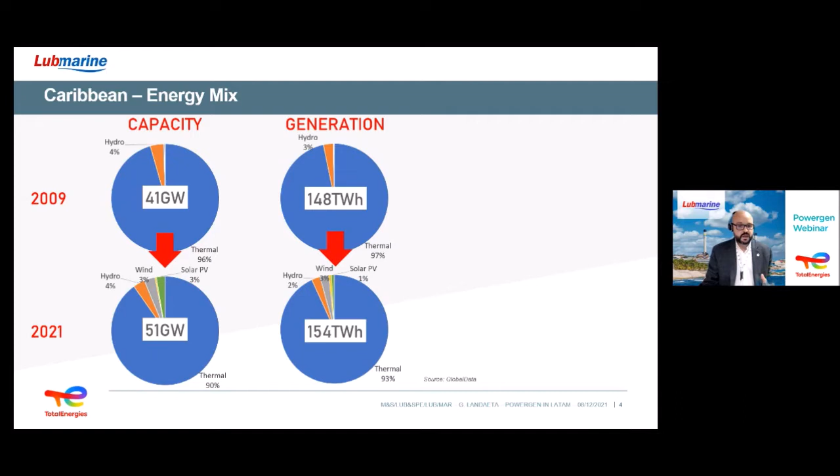But in terms of real generation, we see the zone increasing from 148 terawatt-hours to 154 terawatt-hours, and the mix shows these new technologies being used at a different rate than what capacity shows. We passed from 3% generation on hydro to 2%, a small decrease, or let's say stable in terms of net terawatt-hours. We see wind and solar increasing, but not enough to disturb what the thermal generation may have — still a decrease, or we may say a stable number of terawatt-hours.

So indeed, what we are seeing is the region quickly turning to gas and renewables. This thermal capacity — we'll check afterward how the mix inside it is changing. We can say the region invested heavily in new capacity, probably forecasting a big increase in demand, but it didn't follow the same trend: capacity increased 24%, while demand only grew 4%.

This thermal capacity increased 17%, and as I mentioned, the real generation remained the same. So again, expecting a higher demand than actually came. Yes, may be the case. But the growth came basically from LNG.

54% of new power plants came from pure gas engines. We can see the coal plants sitting in some countries in the region almost double. So we doubled the capacity in coal, but there was no actual growth in generation. And HFO or diesel or oil products increased 5%, but generation dropped 16%. So this is a big decrease in generation. We can see oil products leaving the place for new technologies. We're basically talking about engines, and we are replacing oil for LNG in most cases in general.

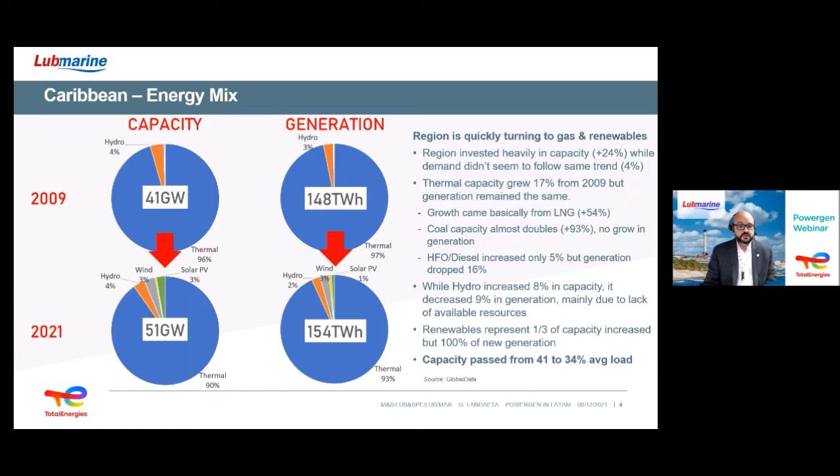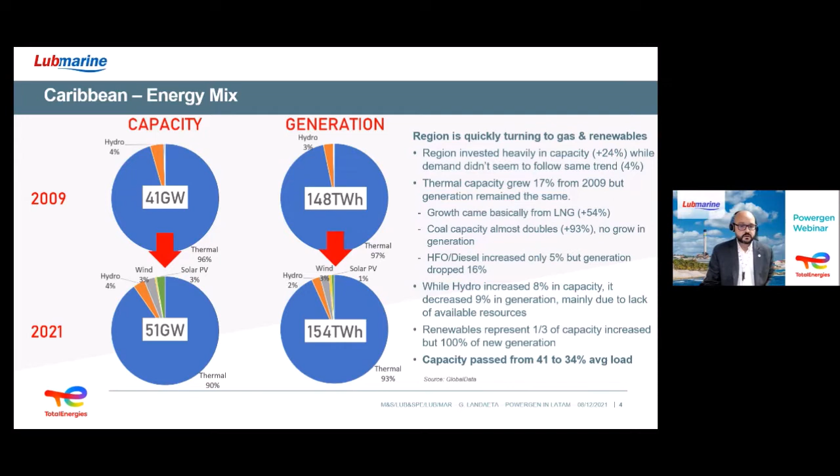And while renewables represent 1/3 of the increased capacity, they represent 100% of the new generation. So these 6 TWh are mostly coming from renewables. This is a big change in the mix for the region. So most of all, if you take these figures into consideration, the capacity passed from 41 to 34% average load. So we are loading the system less. Of course, we have higher capacity with lesser generation in the zone.

Now let's look at Central America. So again, 2 graphics for each year, 2009 and 2021. What we see is a fast pace of growth in capacity, so a big increase in capacity. The capacity almost grew 50%, but demand only grew 32%. So 568 TWh to 753.

The thermal capacity increased 28%, but the generation only followed by 20%. Again, coal and LNG grew in capacity. No new capacity for HFO and diesel, so no investment there. And generation only increased for LNG, while coal and oil products lost 40% of the generation they had in 2009.

Hydro capacity had a steady growth at 23%, let's say half of the growth of the region. Renewables represent half of the increase in capacity, but only 40% of new generation. So we can see a lot of installations, a lot of new plants, probably not turning at the same pace they were intended to. This is, of course, something typical with renewables. We don't know where the sun is shining, we don't know where the wind is blowing, or we cannot predict as accurately as we would want.

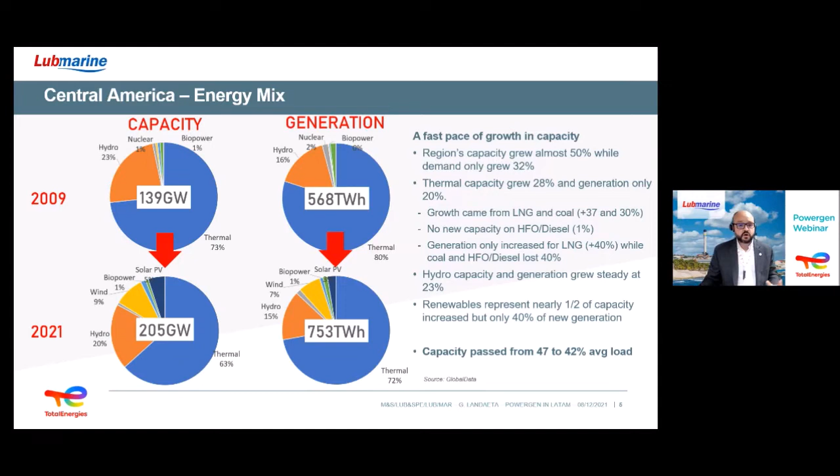And we can see the load of the system passed from 47 to 42. So we can say there was a massive investment in capacity, but demand didn't follow. We wanted to not overload and have spare capacity for the region to allow growth.

Now, if we go to South America, 2 graphics again. This is a region where we have several big power plants based on hydro, so you can see how the colors change. We see a lot of orange, which represents hydro in the graphics, and we can see the mix, which is very interesting to analyze. Of course, we have big countries here: Brazil, Chile, Argentina, Colombia, asking for very big demands.

So a huge appetite for energy and for growth. Again, a big increase in capacity, and demand didn't follow the same trend, only 4%. Sorry, but I think the figures are wrong. I'm going to explain with several graphics. I think this is the wrong version for my presentation.

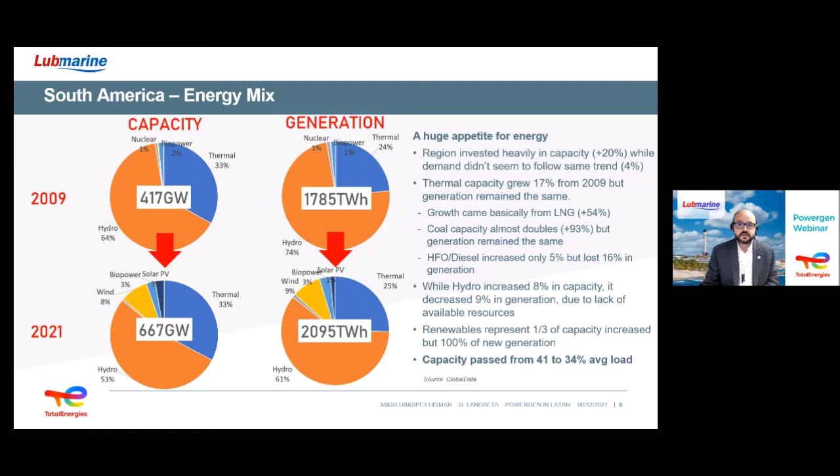So what we can expect for 2030. In the horizon, this is the growth that we can expect for each one of the technologies, in capacity and generation. So this capacity, you can see here the technologies.

Thermal technologies are still expected to grow 10%, but we expect them to generate less. Hydro is in line. We have nuclear, wind technologies, biopower, but major growth coming from solar and wind, as seen in this graphic. So what we can see is the investment in renewables will still not be enough to sustain the growth of demand. The region is preparing for a larger demand than what we have. So this will still be the case. We are still preparing for larger capacity.

Generation is still at 37% of the theoretical capacity. The renewables will not cope with the growth in demand.

We see within renewables, wind is the most popular and preferred technology to be installed, and we see this trend towards 2030.

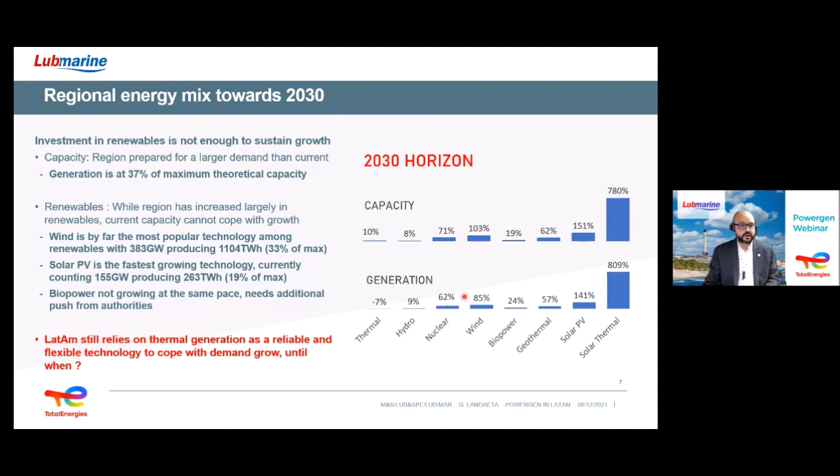Now, when we make a small focus on the thermal technology, we can see in the horizon of 2030 that capacity will increase for coal and LNG, and we'll have a decommissioning of HFO or oil products plants.

HFO and diesel will see a 3% decrease in their capacity. So decommissioning of plants means newer plants will be LNG when we speak about engines, dual fuel.

And when we speak about generation, even if coal will increase in capacity, we expect, because of regulations, to decrease by 36 terawatt hour, meaning 41% less.

This picture is not very clear, but newer coal plants are already commissioned, so the projects are already launched in some countries. But in the horizon of 2030, we expect it to be much less.

HFO diesel will decrease by 22%, and LNG, while you can see a big increase in capacity, will remain more or less the same as today.

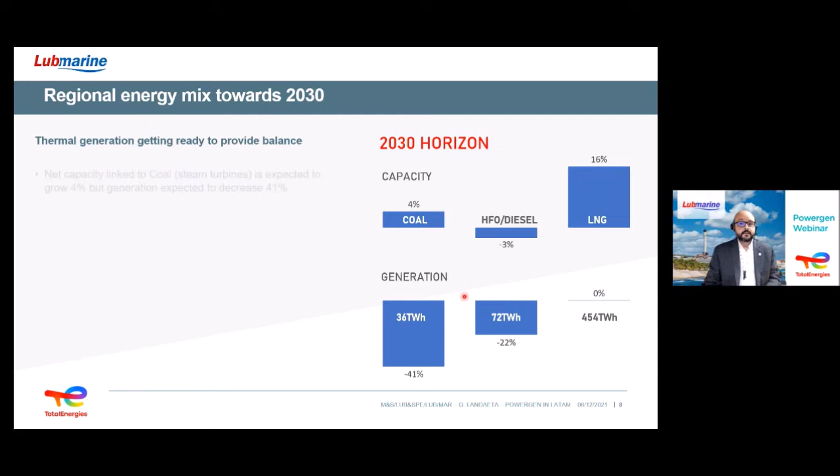So what is our reading from this? The thermal generation is getting ready to provide balance to the grid. The net capacity linked to coal will sustain the system, of course, this massive way of production.

The zone has the resources and will use them. And LNG, being the less contaminating or less polluting of the three technologies, will have large progress. But this capacity, especially for engines, is to provide balance to the grid and to balance new renewable capacities being added to the system.

So the growth of the electric grids, especially in big countries, will push the engines from their base load role to a balancing role in the future. So we expect big capacity but less load factors for these plants.

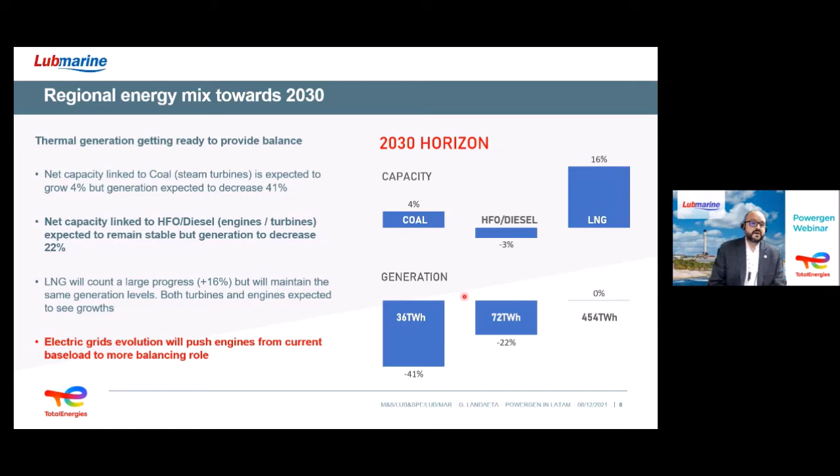So in some verbatims, what we can expect for Latin America: thermal generation growth will be linked to LNG, both turbines and engines. Renewables will grow very quickly, but will not cope with demand. Engine capacity is increasing, but will generate less, so it will move from base load to balancing the grid.

We can see the region invested massively in capacity, but demand did not follow. What will happen next year, when the economy bounces back as expected, is that we forecast this capacity to be used.

Both oil products and coal will still be decreasing, I would say quickly, but in the horizon of 2030 will still be needed. We will still need in Latin America these oil products and coal to produce a lot of the demand.

And last but not least, we don't see new hydro or nuclear plants being much in the picture. So apart from replacing a couple of reactors, we don't see it to be the base of the growth in demand.

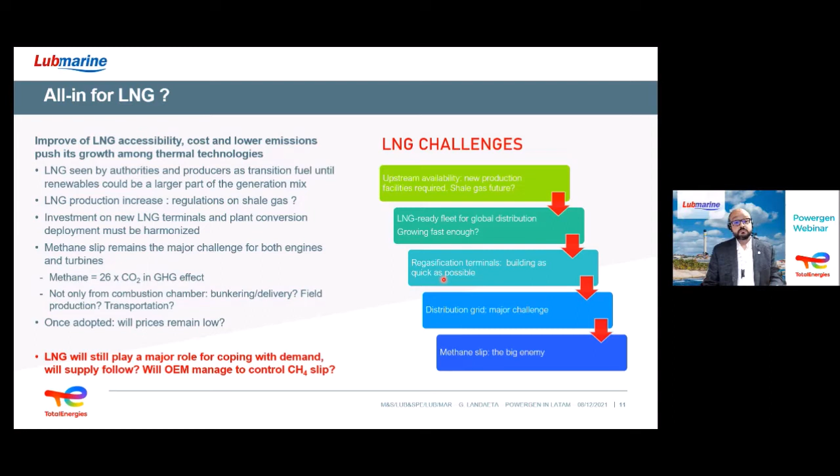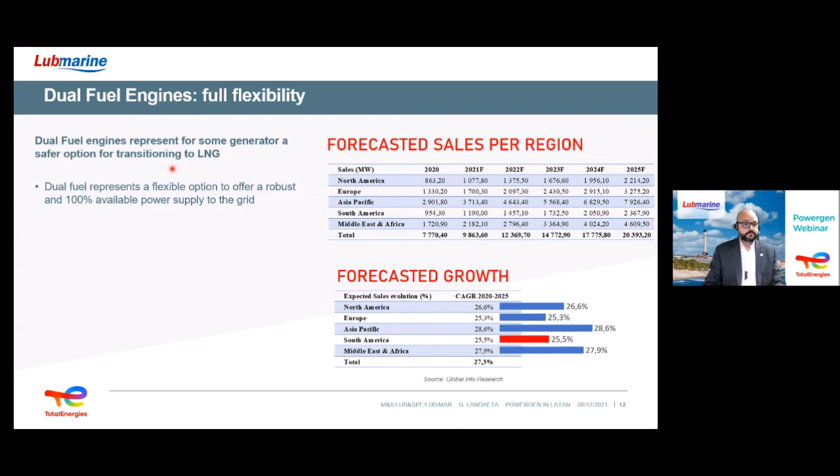So you grow 27% in average. Of course, engines are more expensive, they have a bigger complexity in their operation, and for maintenance they have a larger amount of pieces, so they are harder to maintain. So how can we control the cost on the kilowatt hour? It's a big question, and this is a big bet for a lot of operators in the region, especially to have this full flexibility. We will see afterwards when we speak about lubrication, it has a major challenge.

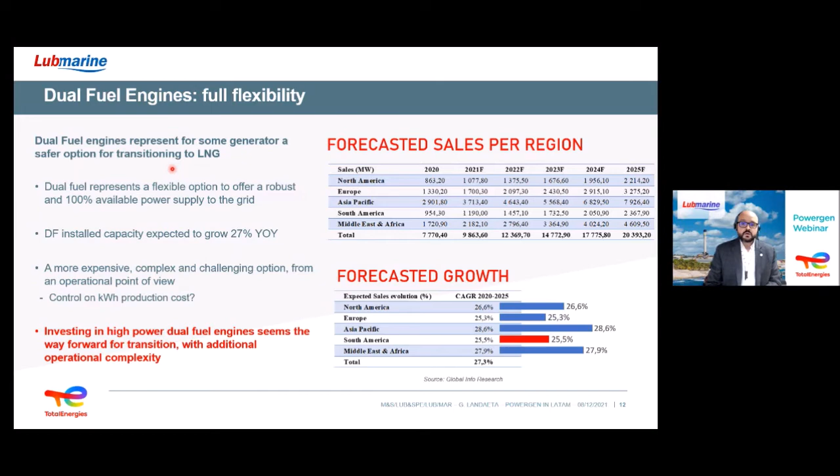And now, HFO and diesel - is it working towards a disparition or disappearing completely from the picture? Let's see. So we know it's a well-known technology. HFO and diesel remains the safer choice for remote islands or isolated sites or even villages that are not connected to major grids.

We know now IMO 2020 pictured a new landscape for fuels and changed the supply landscape for all marine fuels worldwide. So low sulfur fuel oil jumped quickly to be the number one fuel in the worldwide mix. But also we see high sulfur fuel oil recovering very fast thanks to scrubbers, this unit that helps wash the exhaust gas and remove a big part of the sulfur-containing molecule pollution.

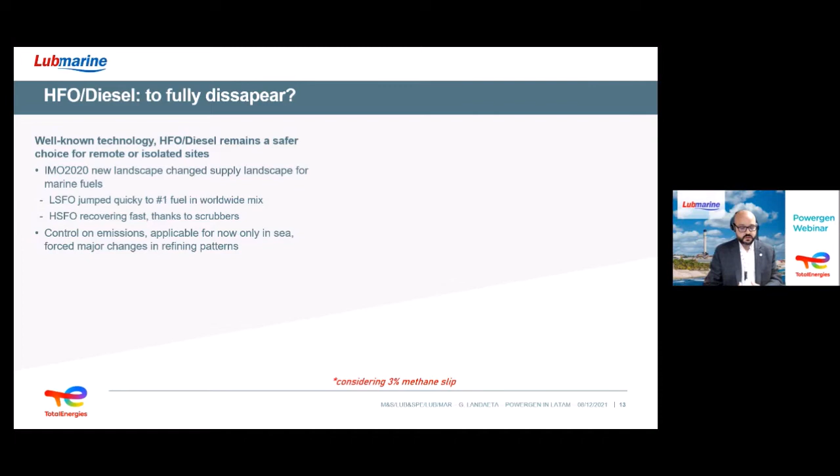So this control on emissions, we are seeing worldwide trends where control on emissions, thanks to scrubbers, is changing the refining patterns. Low sulfur fuel oil is now the number one choice, so it can be available. And on these emission controls at sea, we ask whether our countries' authorities will follow the same path as the IMO regulation. Some countries in the world are taking this direction, asking plants to change from high sulfur fuel oil to low sulfur fuel oil.

We are seeing some requests to install scrubbers in these HFO plants, which we can account for a couple million dollars of investment in the plant. So is this a step that local authorities will take? Could scrubbers become mandatory for HFO plants? It may be a way to maintain the assets running, which are still not at the edge of decommissioning.

And we saw LNG is growing. We see the demand for LNG, the appetite for LNG, is growing. And this means that the market for oil products will be shrinking quickly, as per my opinion. So will this decrease in demand, at some point, with stable supply, push the price downwards? So producing with HFO may be cheaper in the future. The landscape may change with the installation of scrubbers in new plants.

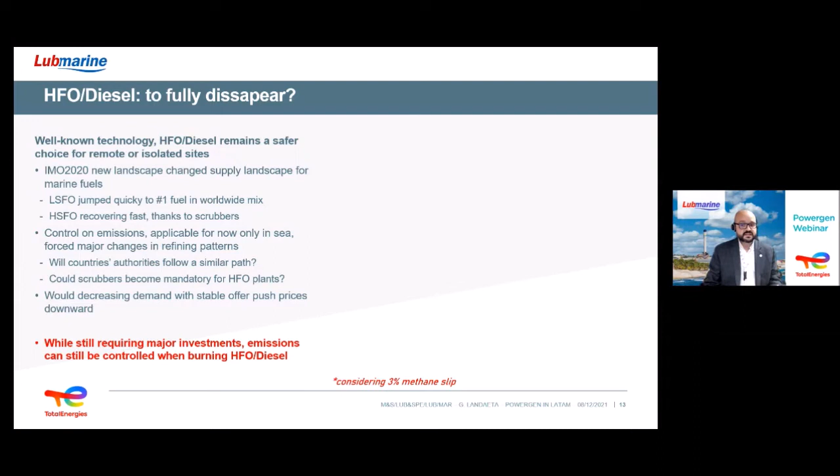And when we compare, taking into consideration methane slip, the equation may be good for oil products. When we take figures from some entities, we can consider that oil engines are producing 0.65 kilograms of CO2 per kilowatt hour. On top of that we have SOx, which we know we can control thanks to scrubbers. We have NOx, which we know we can control thanks to selective catalytic reduction, or SCR systems.

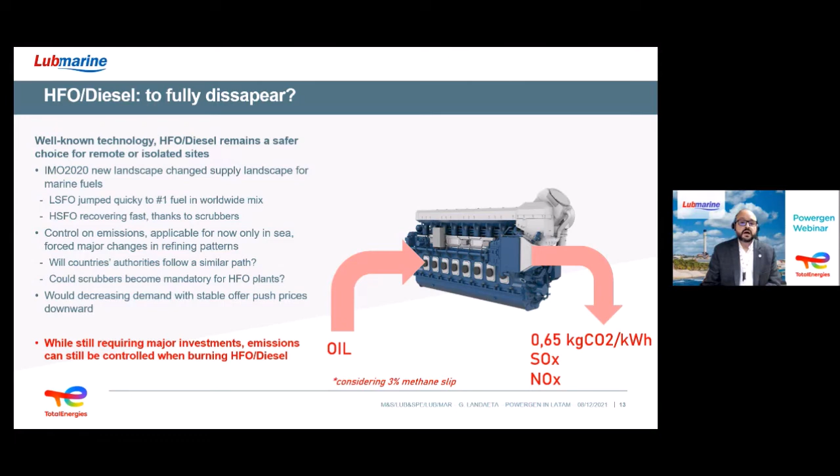And when we compare to LNG with methane slip, of course we don't have SOx, but we have a larger amount of NOx. We can still control them with post-treatment, but considering methane slip, we can see a larger emission of CO2-equivalent emissions to the atmosphere. So oil products can still be in the picture in the future when all these figures are considered.

All right. Once we've checked on the fuels, let's discuss the lubrication challenges.

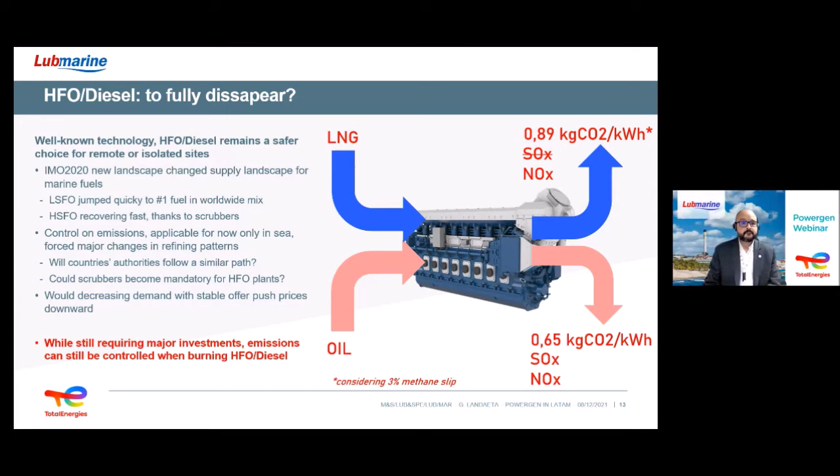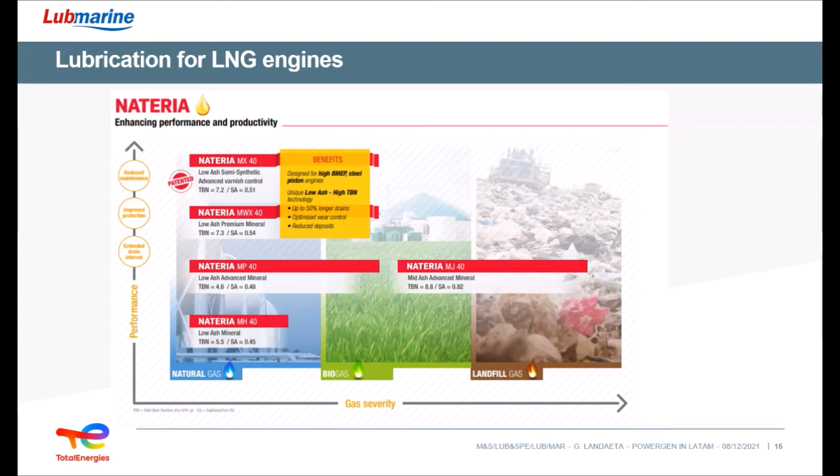I'm going to go quickly through LNG. I'll leave you this picture of the options that TotalEnergies has for lubricating LNG engines. This range of products is worth considering given the challenges brought by burning LNG. Our biggest arguments are high quality of products, larger resistance to varnish. All of our R&D is aimed at controlling varnish, controlling oxidation, or fast oxidation of the oil, to extend the lifespan of the lubricants. And of course, control of deposits, with very low ash, high TBN technologies. We have approvals from all the operators and manufacturers. So you can consult our range of products for usage with natural gas, biogas, or landfill gas.

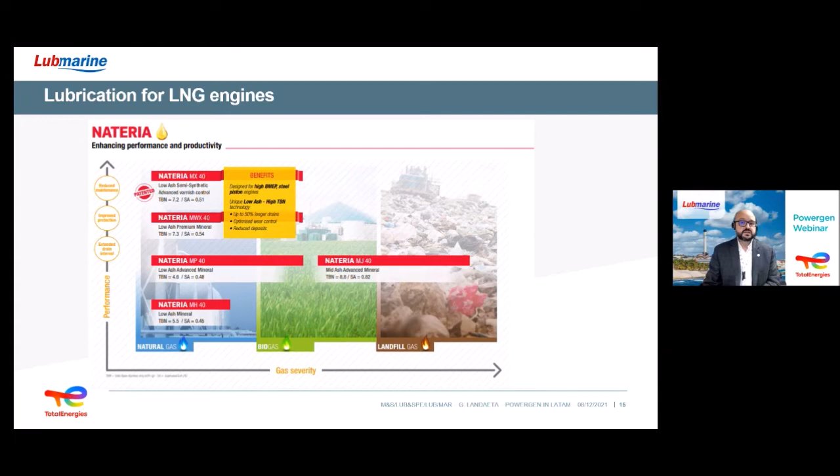All right, I want to focus on dual fuel engines, which I spoke about before. We see for dual fuel engines, of course, three operational modes. This implies great challenges in lubrication. We have two fuels, two injectors in the combustion chamber, which may require two different lubrication strategies.

So LNG requires low BN, high resistance to oxidation. HFO requires high BN, large detergency. Chemically speaking, these are two different molecules, and we cannot combine all these characteristics together. The lubricant, according to OEM recommendations, is defined according to the most impacting fuel in the combustion chamber, most of the time the pilot fuel, being HFO or diesel. Whenever it goes larger than 3%, we should opt for the high BN and detergent lubricant.

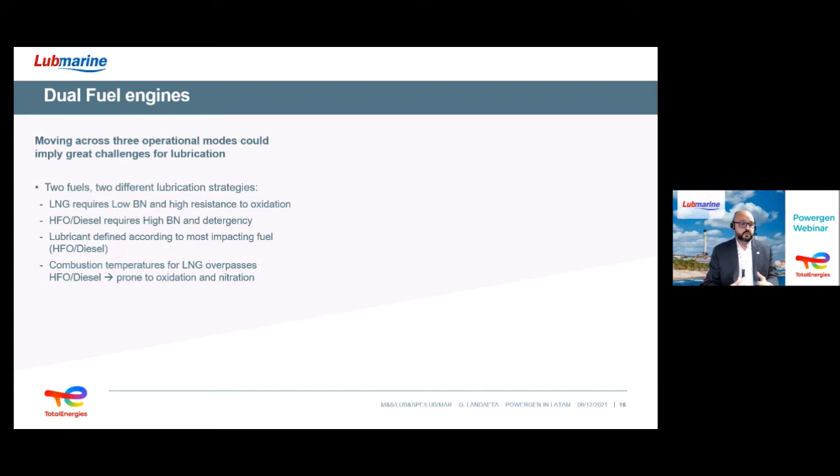Also, we must consider that combustion temperatures for LNG surpass HFO and diesel temperatures. These conditions make the lubricant prone to oxidation and nitration, which may shorten the lifespan of the lubricant by half.

In continuous gas mode with a high BN lubricant, we may have deposits or ash deposits inside the piston, rings, and combustion chamber. On the opposite side, if we use HFO diesel with a low BN, it may produce corrosion. So it's a game of finding the good balance between the operational mode we picked and the lubricant set inside the engine.

So changing operational mode in your dual fuel engine may imply replacing the entire lubricant load inside the engine to match the characteristics of the fuel.

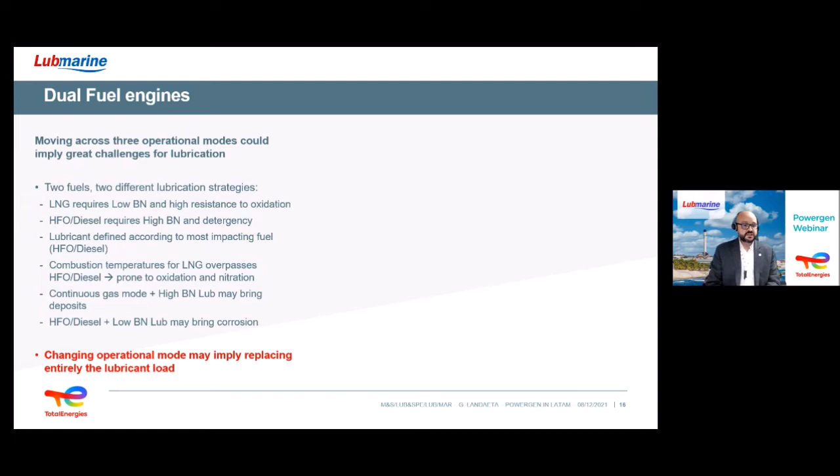This is okay if you have a reliable LNG supply. But what we see from experience is that either the operators choose a liquid fuel to work with, which is fine, or when we go dual fuel with less than 95% gas injection, we still work on a marine lubricant.

Or when we go to continuous gas, which is the preferred operational mode for power generation plants, we can use a low BN. The problem is the engine may automatically increase the liquid injection volume for some period of time, following the sensors and engine setup, and it may jump very quickly from continuous gas to dual fuel, which may bring some nasty effects on the engine.

So this automatic jump between the two modes of operation is a very big challenge for lubricating them. Picking the operational mode is not enough. We need to control during operation that the amount of fuel injection does not go over 5% for a long period of time if we want to avoid damage to the lubricant load.

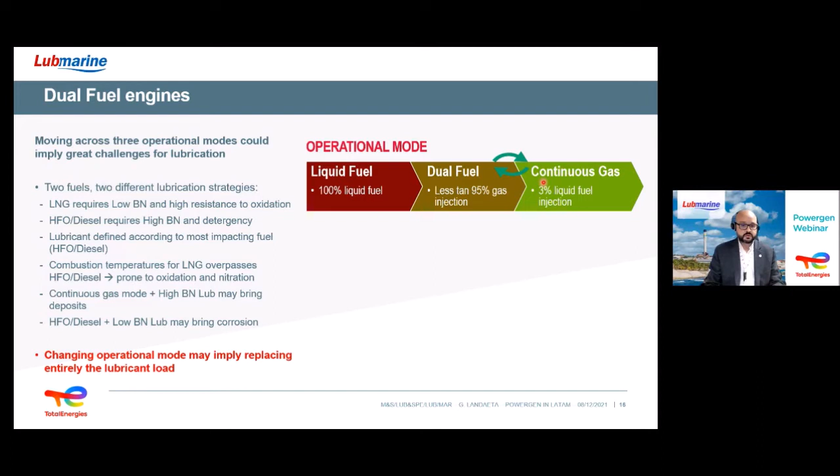In this case, for liquid fuel, if we go Disola or Aurelia, these are in our range of products. We have two lubricants for liquid fuels. They are fully compatible, and we can replace both of them. We can increase the BN if we are working with liquid fuels.

But when you want to go to full continuous gas mode, the recommendation is to switch to a low BN, which in our range is Nateria. Same if you are moving from continuous gas and for some reason want to go back to liquid fuel or dual fuel, the recommendation is to go to Aurelia or Disola. So you will need to eventually replace the load of lubricant.

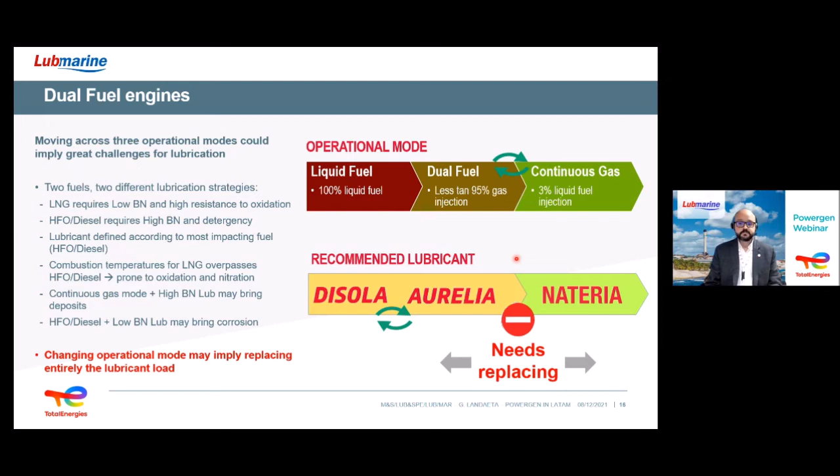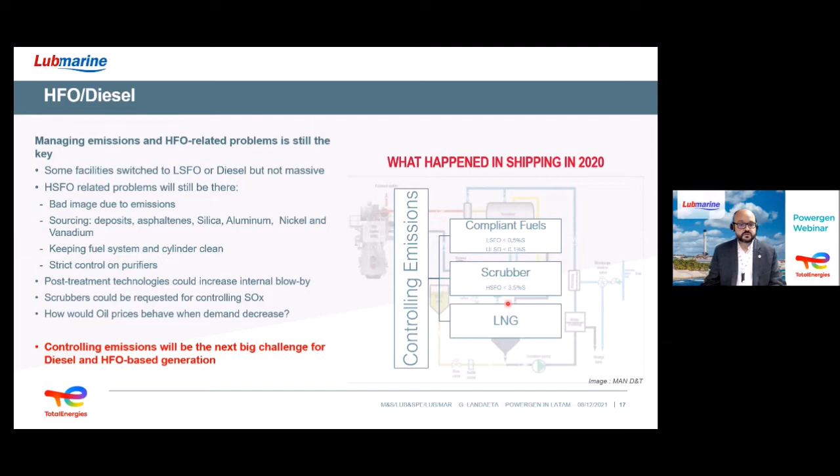So HFO and diesel, last technology. We need to remember what happened in shipping in 2020. We had three choices of fuel to control emissions: going to compliant fuels, low sulfur less than 0.5% sulfur, or ultra low sulfur fuel oil less than 0.1% sulfur content; keeping scrubbers with high sulfur fuel oil less than 3.5%; or switching to LNG.

So managing emissions is still key. Some facilities are still changing to low sulfur fuel or diesel, but this is not massive. High sulfur fuel oil is still there, and the switch of lubricants, or the challenge of the lubricant, is still harder.

Because for refining or obtaining this low sulfur fuel oil, we may have larger deposits, larger molecules: asphaltenes, silica, aluminium, nickel, vanadium. So low sulfur content doesn't mean it's a cleaner fuel. It just means we have a larger amount of molecules going into the mix to obtain this low sulfur content. So keeping the fuel system and the cylinder clean is a big challenge for operators at sea.

A strict control on the purifiers, both fuel and lubricants, is still necessary. This remains a big challenge, and in terms of lubrication, detergency is of course key.

Also, what we spoke about controlling emissions means increasing the internal blow-by. If we go to exhaust gas recirculation to decrease temperatures and create less NOx, this amount of blow-by will greatly affect the quality of the lubricant. So we consider this in the design of our lubricants.

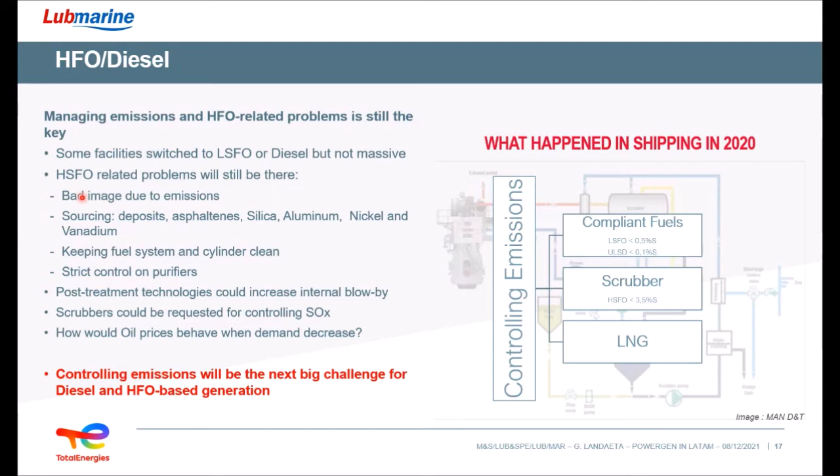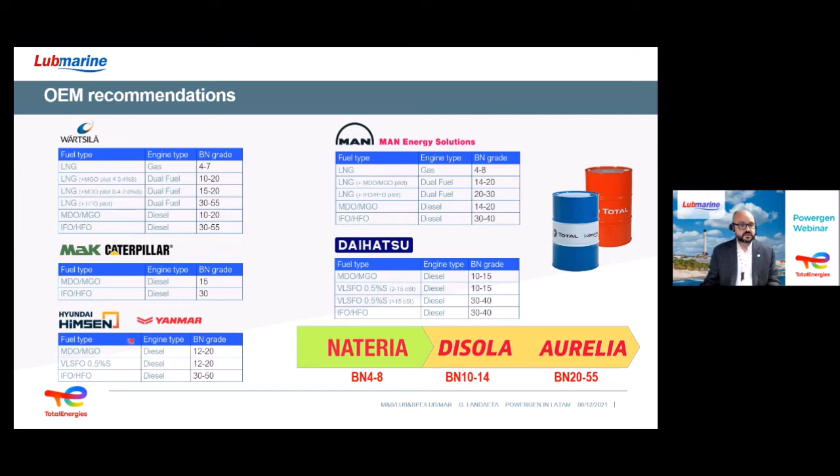Of course, we have approvals and we have all the no objection letters for each one of these engine manufacturers.

Today I wanted to present our fuel economy program, which is also a part of controlling emissions. First product is Aurelia FE, Aurelia Fuel Economy. It's an innovative fuel economy lubricant for medium speed engines, a complete new formula, a multi-grade formula designed to reduce friction.

This product is available for field trials, so for selected candidate engines. Don't hesitate coming to us if you want to have a trial of the product, we are open for this process today.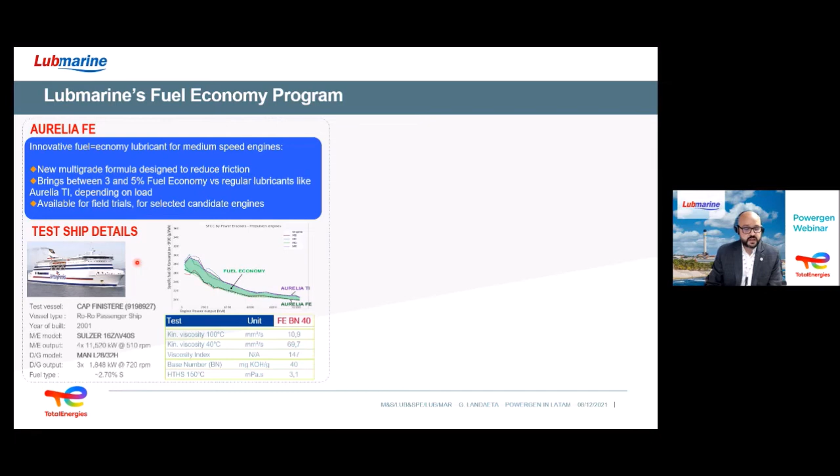So we are attacking fuel economy from the friction point of view of all mechanical parts, but we also have colleagues in TotalEnergies that work in fuel additives. This is the second part of our fuel economy program.

We have developed over 4 years these fuel packages that help improving the fuel combustion and handling of the fuel. What we can see also is by improving this fuel economy and improving the detergency of the fuel system, we have an extended effect on the lubricant. So we can extend its performance, improve the performance and extend the lifespan, which is extremely good to have.

So our core packages are aimed to manage performance and fuel economy, the fuel system detergency, lubricity improver. This is especially important when you are dealing with marine diesel oil or gas oil, or low sulfur, ultra low sulfur diesel oil, because you need lubricity improver for the fuel pumps.

Also biocides for fungi and bacteria in the storage tanks, and for heavy fuel oil, especially low sulfur fuel oil, managing wax and asphaltene dispersants. This also brings a small fuel economy from purifiers, which are expected to work much less because these two molecules are easier to separate.

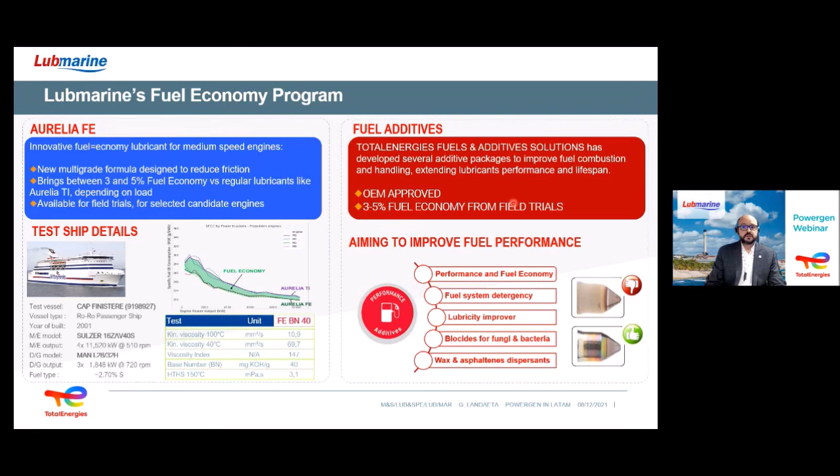Now I want to speak about our logistics, passing from the products to the services chapter. Since we are a worldwide unit, we are operating more than 60 blending plants across the world to supply our customer needs.

We have appointed 7 plants worldwide to be our export hubs, so this allows us to have a top of the class logistic network that is ready to export lubricants whenever it's needed for our customers. These plants are able to export lubricants in bulk or packed.

All Lubmarine grades are available. We have big reactiveness and proactiveness to be quick and to avoid any rupture in your supply. We cover more than 700 ports around the world with permanent stock, and we can supply any emergency need required from these warehouses. This is our first service I wanted to speak about. We are very proud because we have been working a lot to put these hubs together, and we can really be reactive and supply all your needs to avoid ruptures.

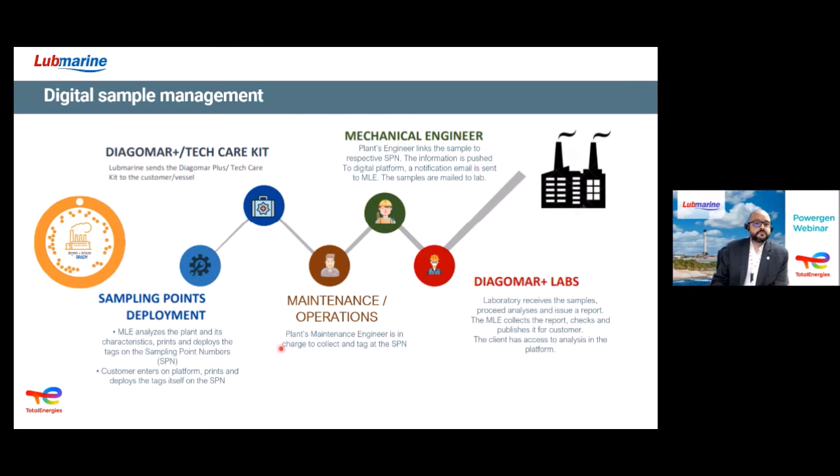We can also provide, as part of our services, all of our expertise. We can join you during your overhauls, during maintenance operations you may have, and check with you the lubrication performance you may find. We have 19 marine lubrication engineers across the world, so a first level of service. We can also run partial or full investigations on any problem you may have related to lubrication. We can help you during switchover, training of all the staff in the plant to be more aware of all the lubrication needs, and even put together tailor-made seminars for you. So we can speak about lubrication, we can train you, and bring all the knowledge that we have in Lubmarine for you.